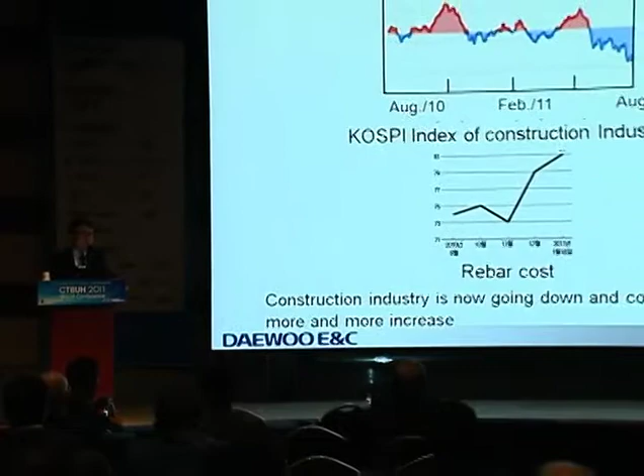Nowadays, the construction industry is going down. It is mainly because of the economic recessions, global economic recessions. Also, the construction cost has increased due to the shortage of natural resources.

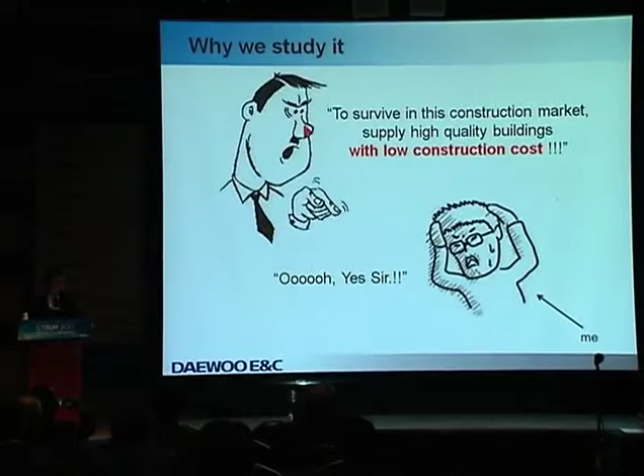This is my boss. He always told me that, pushed me to do something to survive. And then this is me. I'm always squeezed and pressurized due to my boss.

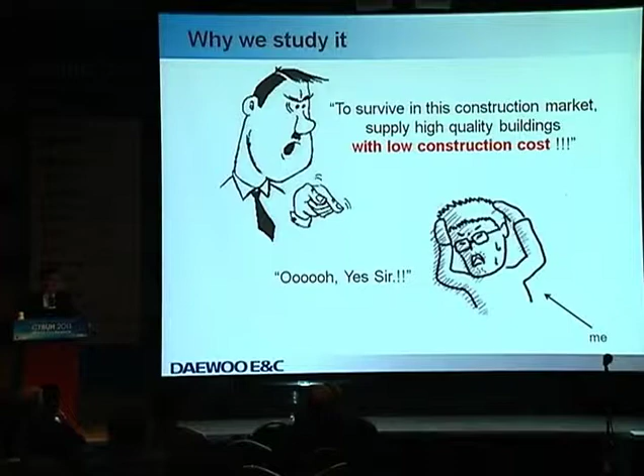Anyway, as a wind engineer, I tried to find out some ways to reduce the wind load by checking the design wind velocities and the procedure of wind tunnel test and an evaluation method of the wind load and wind-induced responses.

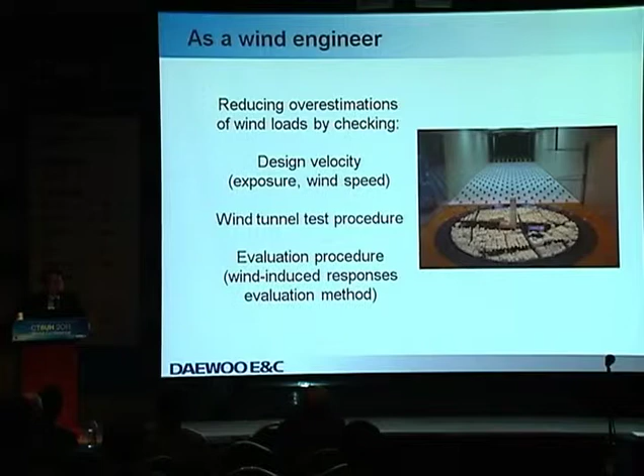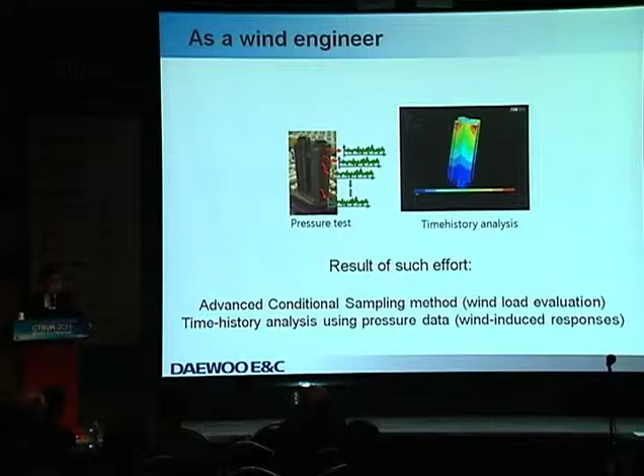As a result of such an effort, I developed some new wind load evaluation methods, and some wind-induced response evaluation methods. But there are still some problems that exist.

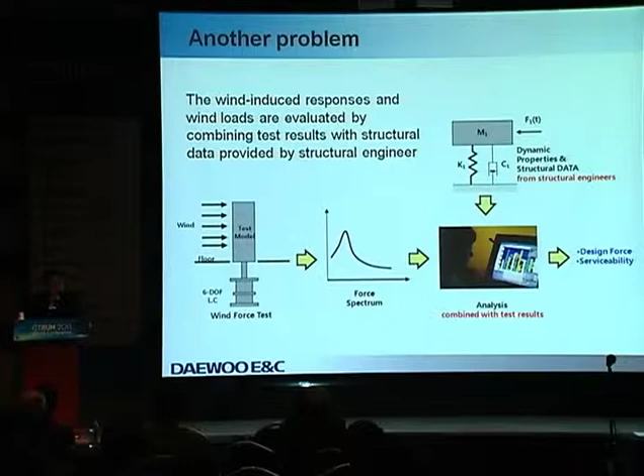Actually, in evaluation of wind-induced effects, we have to use structural engineers' data, such as the dynamic properties. In the evaluations of the wind-induced responses and wind load, the measured wind forces are combined with the dynamic properties, structural information provided by the structural engineers.

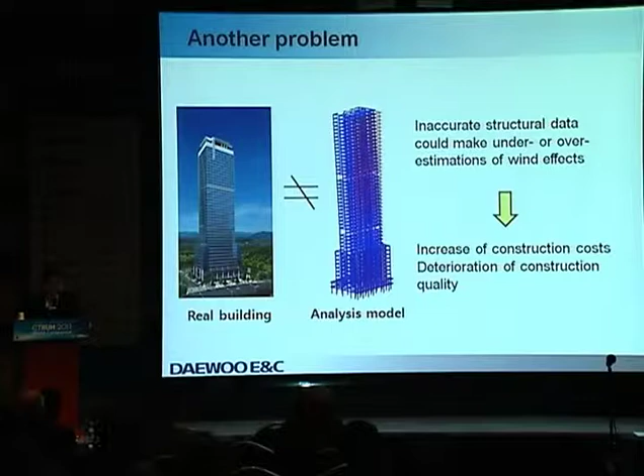However, we found that the dynamic properties estimated by the FE models are quite different from the actual dynamic properties of buildings. Such inaccurate structural data could lead to under or overestimations of wind effects. This also leads to an increase of construction cost or deteriorations of construction quality, the building's quality.

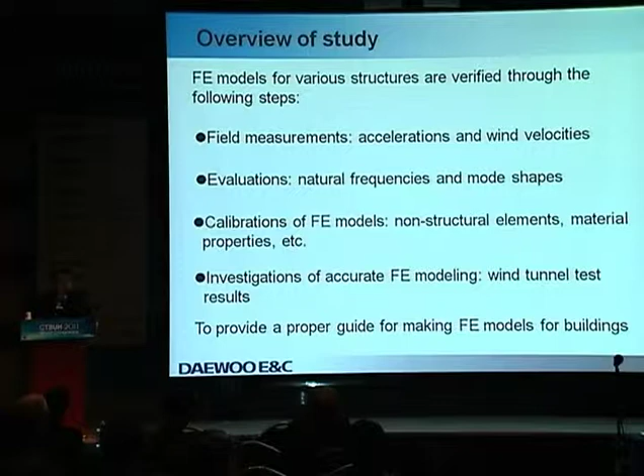So we determined to propose a procedure to make FE models for estimating accurate natural frequencies and mode shapes. Firstly, we performed field measurements for our chosen buildings, and then we evaluated the dynamic properties using the measured data. Then we calibrated the FE models of the chosen buildings based on the measured dynamic properties, and proposed some procedures for making the FE models.

These are the chosen buildings. The first three were almost constructed when the field measurements were performed.

We proposed a procedure to make FE models using these buildings, and then using these buildings, we verified the proposed FE modeling procedures. Before construction, we predicted the natural frequencies and mode shapes, and then the predicted results were compared with the measured dynamic properties after construction.

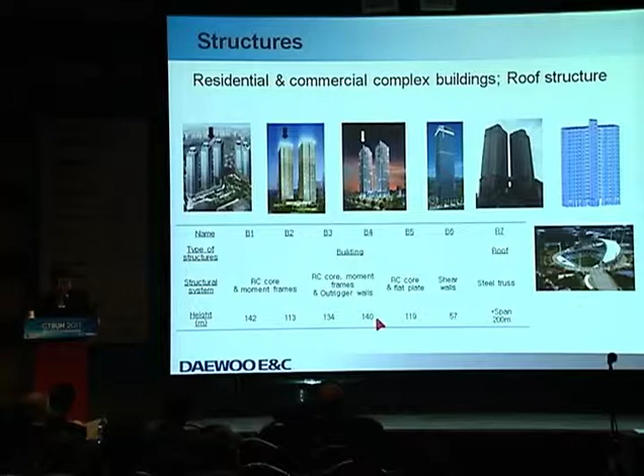These buildings include a case of coupled tall buildings, a typical type of apartment building in Korea, and a case of large span roofs. The overall heights are about 110 and 140 meters.

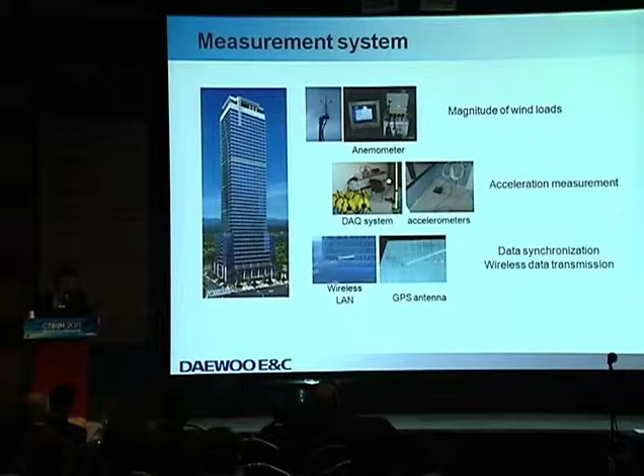We installed accelerometers and anemometers to measure the acceleration data corresponding to the wind velocities. Also, for data synchronization and wireless data transmission, we used GPS antennas and a wireless LAN system.

We used a total of 24 accelerometers on the building. 3 of them were installed on each floor to measure the translational and torsional modes. Also, the accelerometers, except on the reference floor, moved from floor to floor to measure the overall mode shapes.

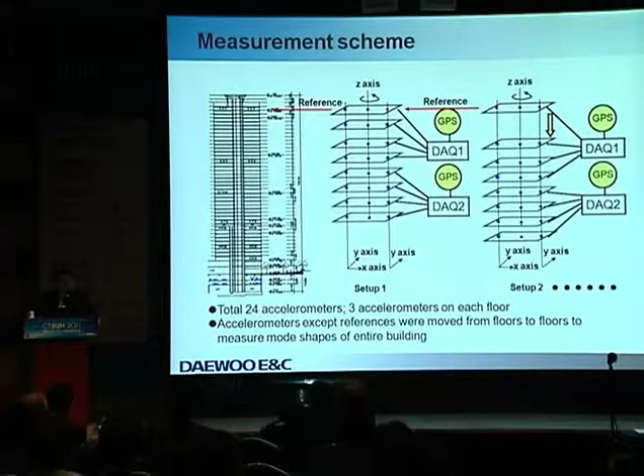Based on the measured acceleration data, we evaluated the actual dynamic properties, and then based on the measured dynamic properties, we calibrated the FE model to match the analyzed dynamic properties to the measured ones.

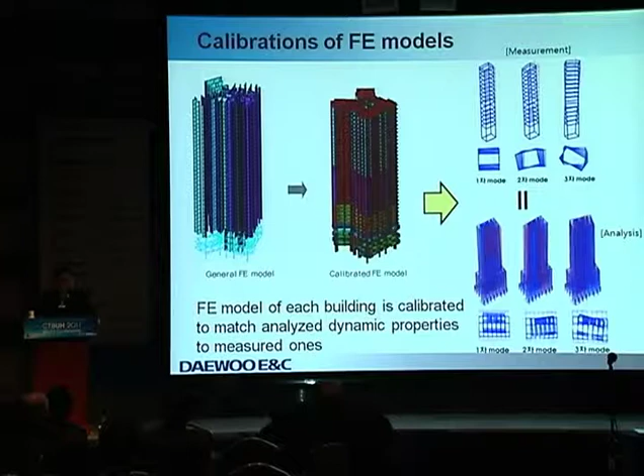For building 1 and building 3, the FE models were calibrated by considering these factors. Actually, the floor slabs are modeled in the FE model using diaphragms. However, the flexural rigidity of the floor slabs should be considered in the FE model because they contribute to the lateral stiffness of the overall buildings.

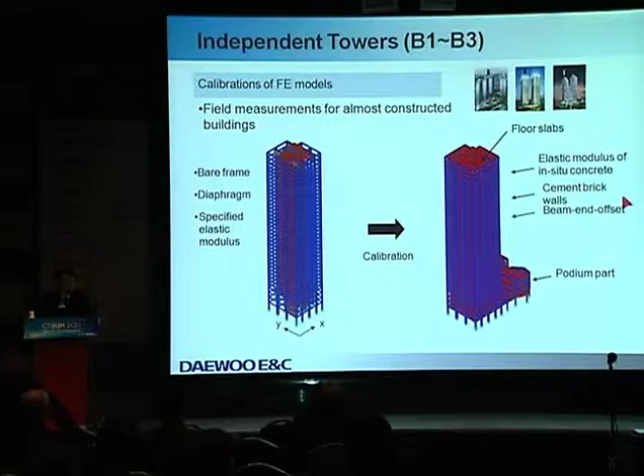Also, the increase of elastic modulus of in situ concrete and non-structures were considered in the FE model for the calibrations.

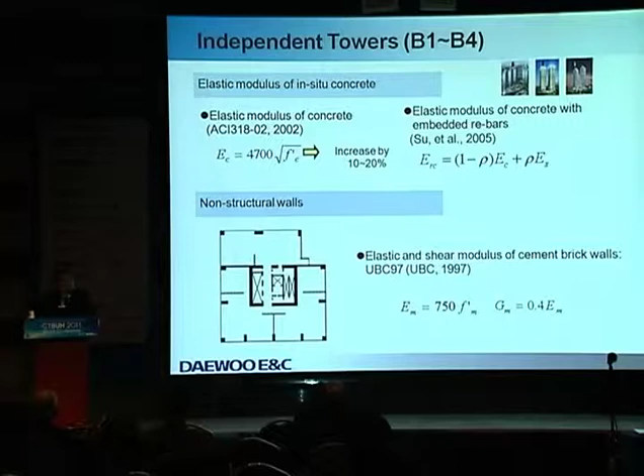Generally, the compressive strength of the in-situ concrete is a little higher than the specified one, because of the concrete quality controls. This also leads to an increase in the elastic modulus of the concrete.

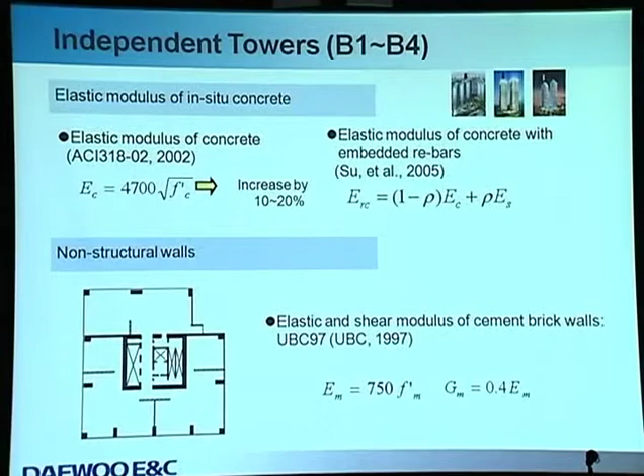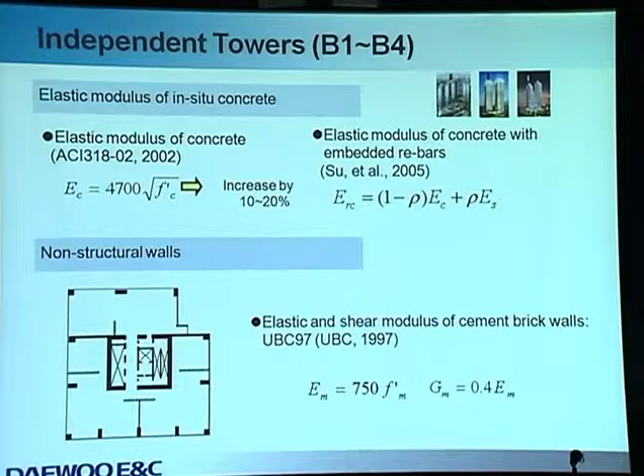The non-structural walls are generally neglected in the FE models because they are non-structural elements. However, their stiffness considerably contributes to the overall stiffness of the building, so they should be considered in the FE model to get accurate dynamic properties. These factors are considered using the currently used provisions.

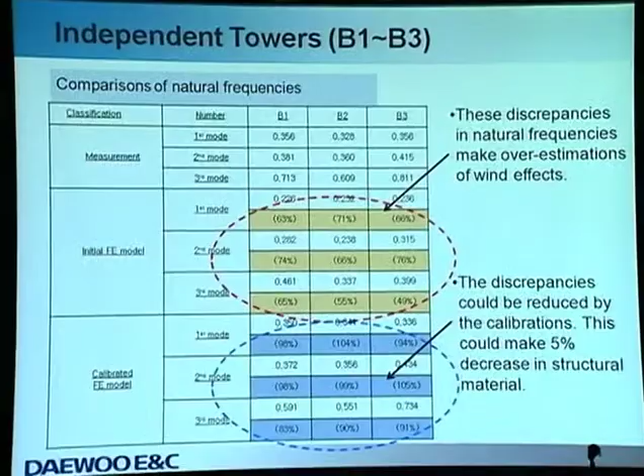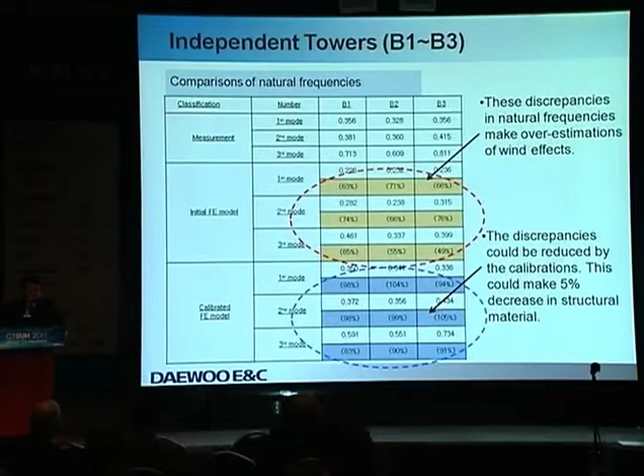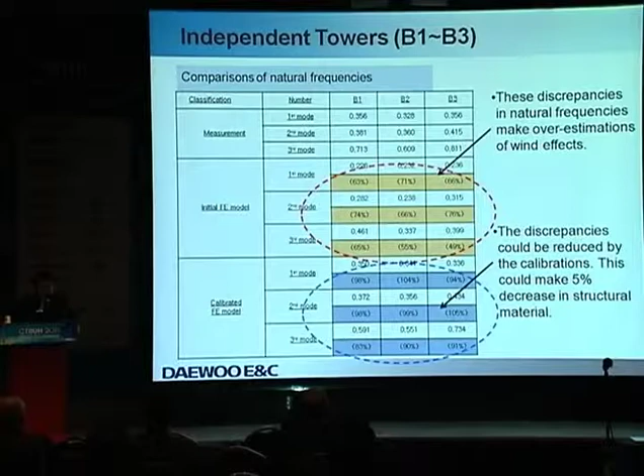Before the calibrations, the analyzed natural frequency is much less than the measured one. These discrepancies in natural frequencies cause overestimations of wind effect. However, after the calibrations, the discrepancies were reduced to within 5%. This could result in 5% savings in structural materials used.

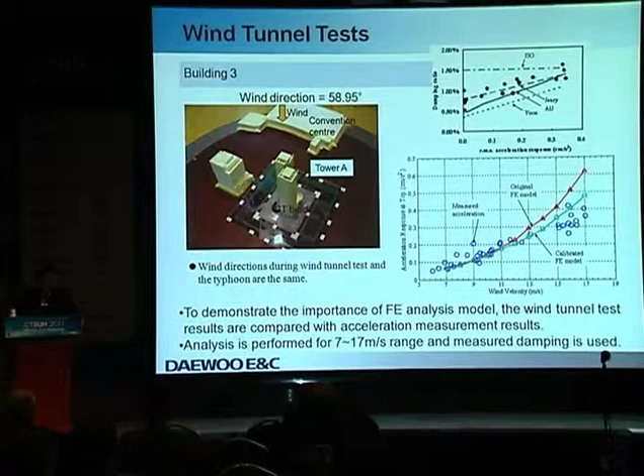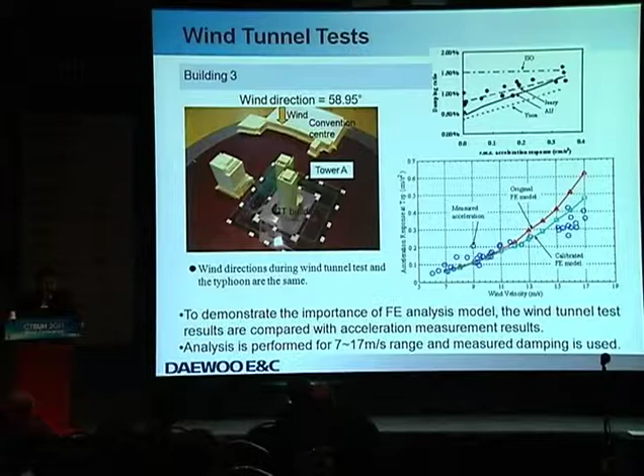To demonstrate the importance of accurate FE models, the wind tunnel test results were compared with the measured acceleration data, as shown in these graphs. The pressure data were measured for these buildings and converted to wind forces, then the acceleration responses were calculated using time history analysis. As shown in this figure, the accelerations derived using the original FE model are quite larger than the measured one.

Therefore, this implies that the structural cost might be increased due to the overestimated wind effect.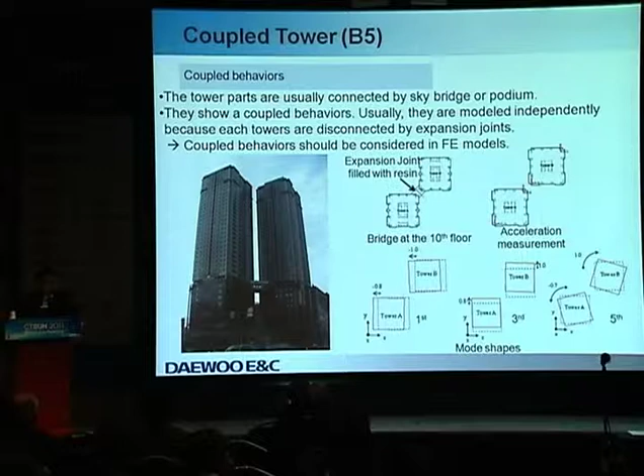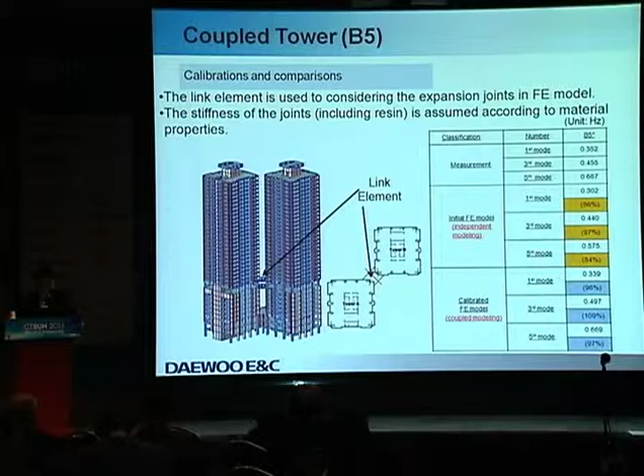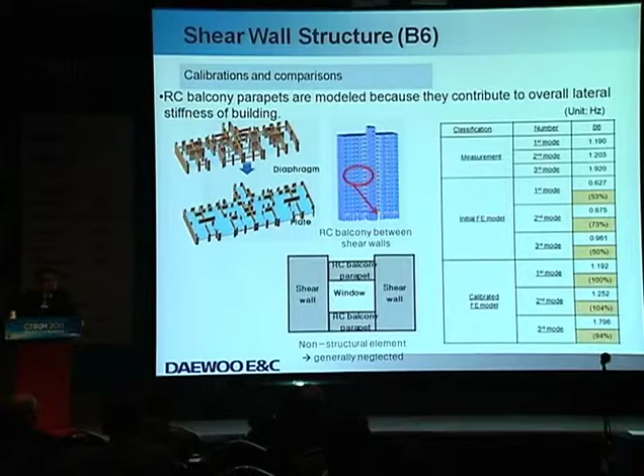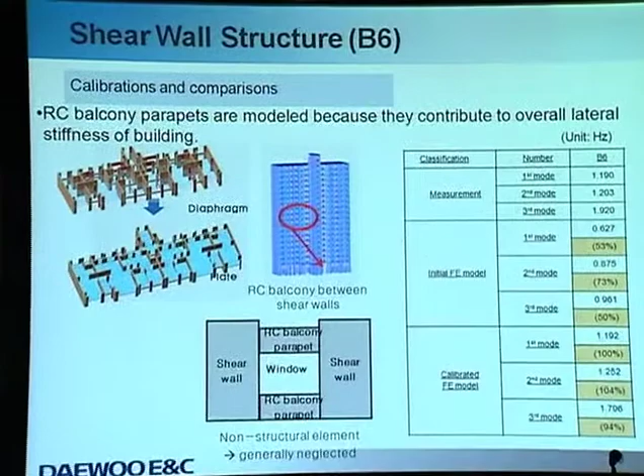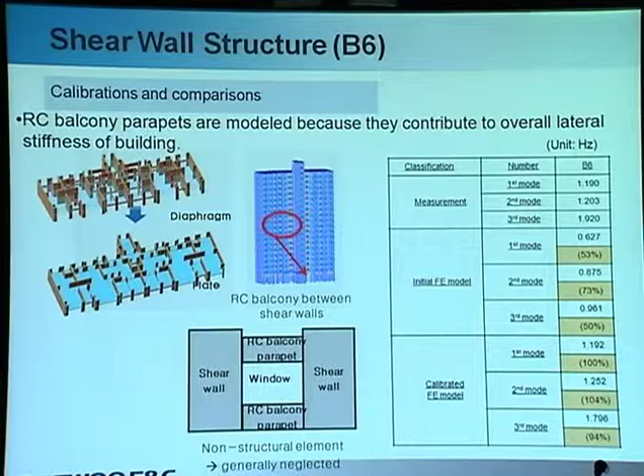This is a typical type of building in Korea. The apartment buildings usually consist of only shear walls. Between the shear walls, there are balcony parapets constructed using reinforced concrete. This kind of balcony influences the overall stiffness considerably. So after considering this balcony parapet in the FE model, we could get more accurate natural frequencies, as shown in these tables.

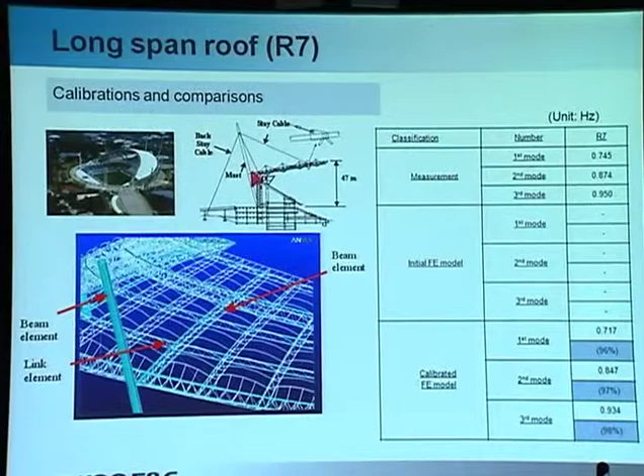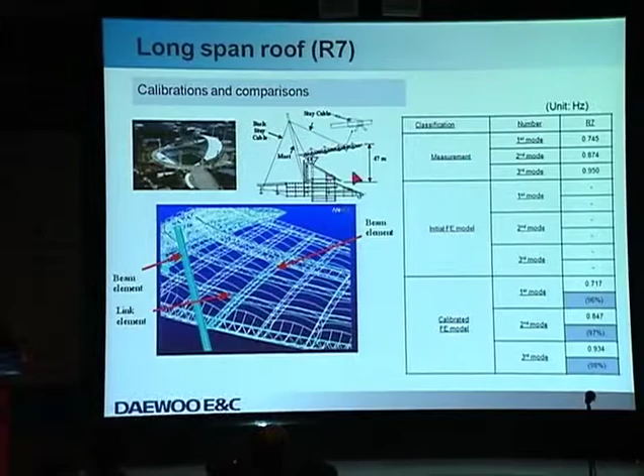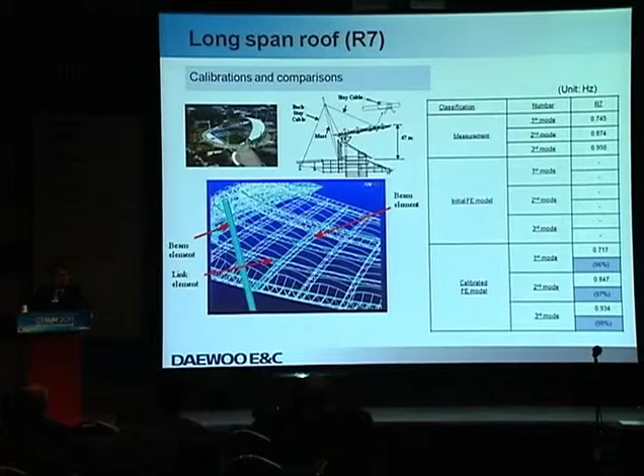Also, a field measurement was performed for long span roofs. As shown in this figure, the roof trusses were fabricated on temporary shoring structures, and then the mast was linked to the rear of the roof trusses, and the stay cables were tied and pre-stressed. After that, the shoring structures were removed. These construction procedures were considered in the model making, and using this FE model we could get accurate natural frequencies compared with the measurement result.

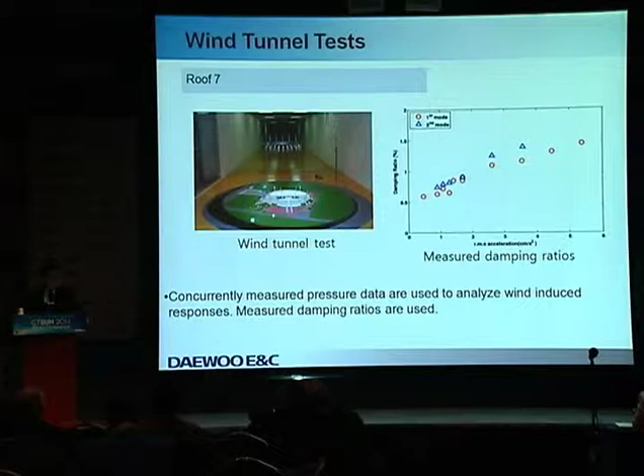In the dynamic analysis, the added mass effects were also considered for the evaluation of wind-induced responses. The fluid near the surface generally could act as an additional mass. Irwin and Minami proposed an expression for the added mass. After considering the added mass for the evaluation of wind-induced responses, we could get a more accurate result, as shown in these figures.

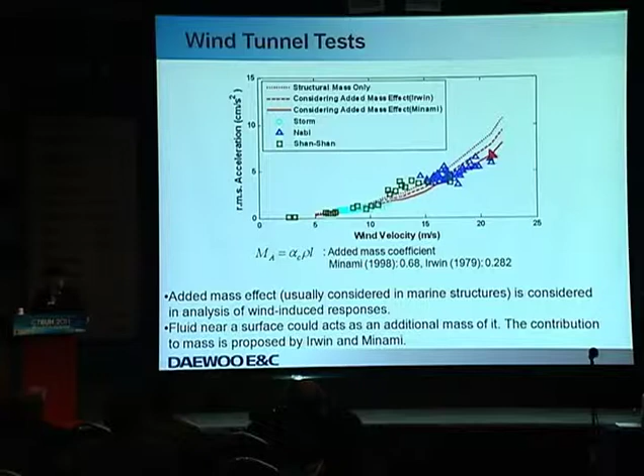So from these comparisons and calibrations, I think that we should pay more attention to FE modeling to get a more accurate result from the wind tunnel test. We should consider the in-situ material properties, non-structural elements, coupling effects, and so on. Also, we have to perform more studies about dampings and aerodynamic effects using field measurement.

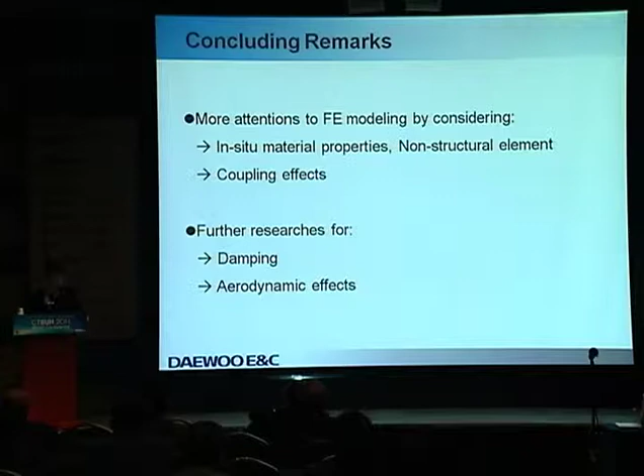So more attention to the FE models, I think, contributes to saving construction material as shown in this amount. On the other hand, we could also make some CO2 reduction as shown like this. So I think that I can make more accurate FE models. I can save my company, and then I can save my Earth.